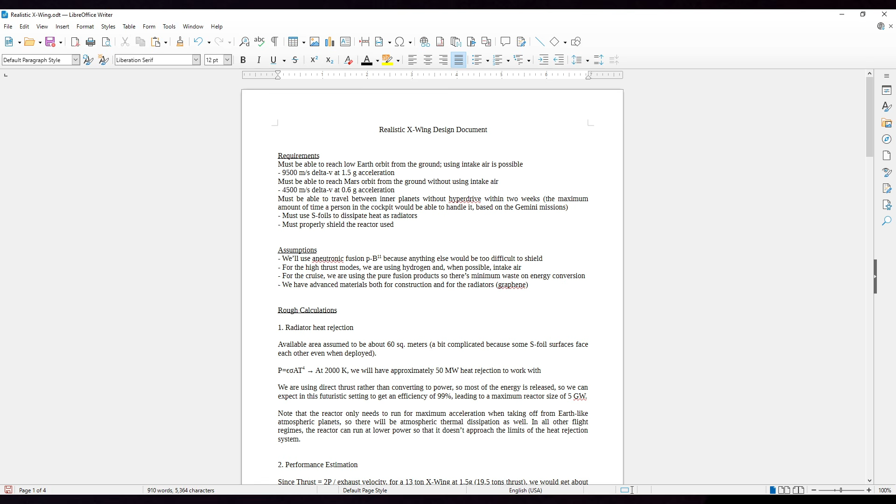So I have decided to do the calculations for this. And so this is going to be a math thing. I'm going to talk through exactly what can be done about this situation. Now, this is admittedly not the kind of thing that I tend to get many views on. As soon as I show this as a text document, people run away. That's why I started with Blender and the X-Wing there. But we are going to talk about a realistic X-Wing design that might work, and I'm going to go through it in detail, and then you guys can tell me what you think.

So what are our requirements? Must be able to reach low Earth orbit from the ground using intake air if possible, right? It seems to have intakes, right? So we're going to assume that they are accessible, that we can make use of them. We need 9,500 meters per second of delta V at 1.5 g acceleration from the start. It also must be able to reach Mars orbit from the ground on Mars without using intake air. So that's 4,500 meters per second delta V at 0.6 g's acceleration.

Must be able to travel between the inner planets without hyperdrive within 2 weeks, the maximum amount of time a person in the cockpit would be able to handle it based on the Gemini missions. The cockpit seems to be a normal cockpit. The Gemini astronauts were able to deal with it for 2 weeks. I am going to assume that 2 weeks is possible going from one planet to another. We're not going to deal with outer planet distances. I have never actually seen in Star Wars them traveling between outer planets. They're always traveling between small rocky planets. So we're going to go with that to simplify things.

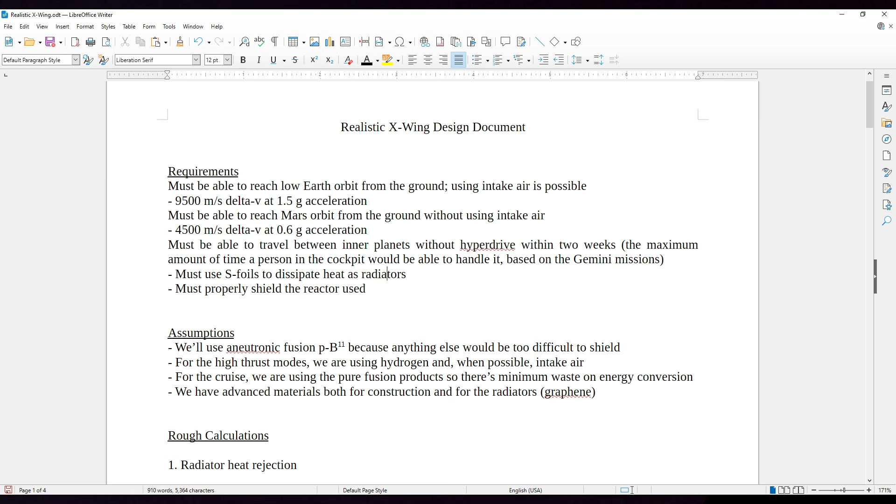Must use S-foils to dissipate heat as radiators. Well, what else are we going to use, right? Must properly shield the reactor that is used. So this is our realism. We are going to actually have some delta V calculations. We're actually going to talk about the radiators and shielding.

So the assumptions: we'll use aneutronic fusion, that's proton-boron-11, because anything else would be too difficult to shield. It produces too many neutrons, and then our shield would be heavier than we want it to be. Realistically it's probably heavier than we want it to be anyway, but we're going to assume that the people of the ancient galaxy were a little bit more radiation resilient, maybe. I don't know. But it depends on how you look at the confinement of it. And also the fact that we are running it for at least 2 weeks, right? So let's not talk about it. Anyway, we'll try our best.

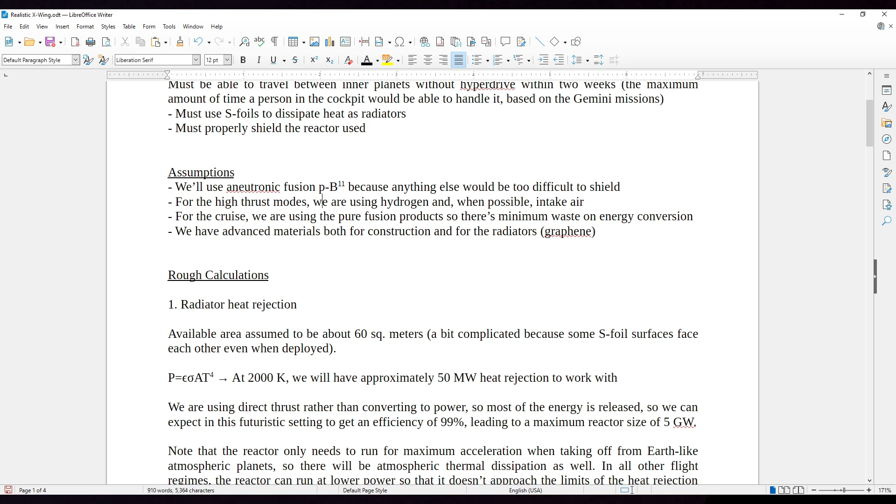For the high thrust modes, we are using hydrogen and, when possible, intake air. For cruise, we are using the pure fusion product, so there's minimum waste on energy conversion. So we're just spitting out the result of the proton-boron fusion, okay? And so it's the actual fusion results that we are sending out there. We have advanced materials, both for construction and for radiators, graphene or something like that. So we can get a good temperature on them.

So radiator heat rejection. Available area is assumed to be about 60 square meters. It's a little bit of a problem because the S-foils have surfaces that face each other, right?

So I'm not counting the full amount of those surfaces, but we need them to radiate a little bit. So it's sort of like each of those has got a good 12 square meters and a bad 3 square meters, sort of like that. Anyway, that amounts to 60 square meters is what we're aiming for here with the 4 wings, if you will.

And then there's the equation that determines how much heat rejection we can get out of the radiation from the radiators, not the radiation from the reactor. So this will scale our reactor, is what I'm saying. So at 2000 Kelvin, which is pretty hot, but maybe we can manage that. Certainly some of the fancier radiators in KSP Interstellar can do much more than that. We will have approximately 50 megawatts heat rejection to work with based on this equation.

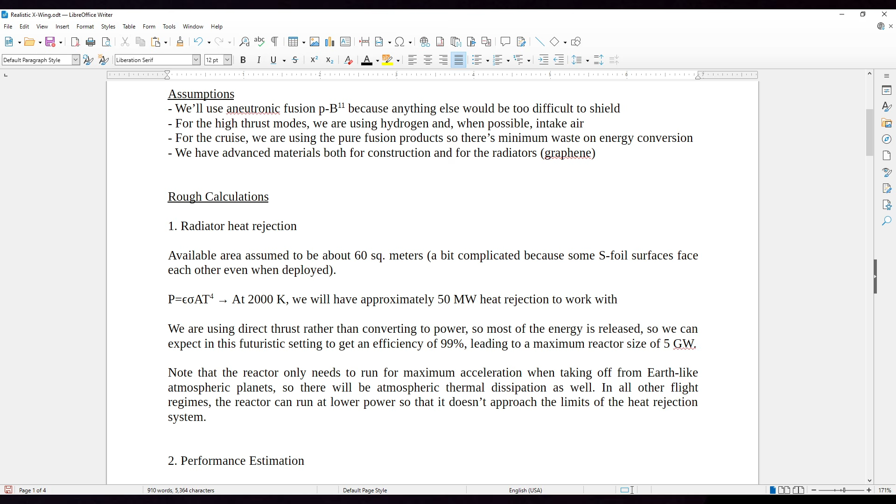And we are using direct thrust rather than converting to power. So most of the energy is released, so we can expect in this futuristic setting to get an efficiency of 99%. I'm asserting that. I've talked about the efficiency before, and I've corrected the far future engines based on the better ones having 99%, or even with the pure antimatter one having better than 99%, but this is what we're going with, 99%, which is better than anything we can do right now, of course. So when we say realism, we mean physically possible in theory. We're not talking about like we can do it right now.

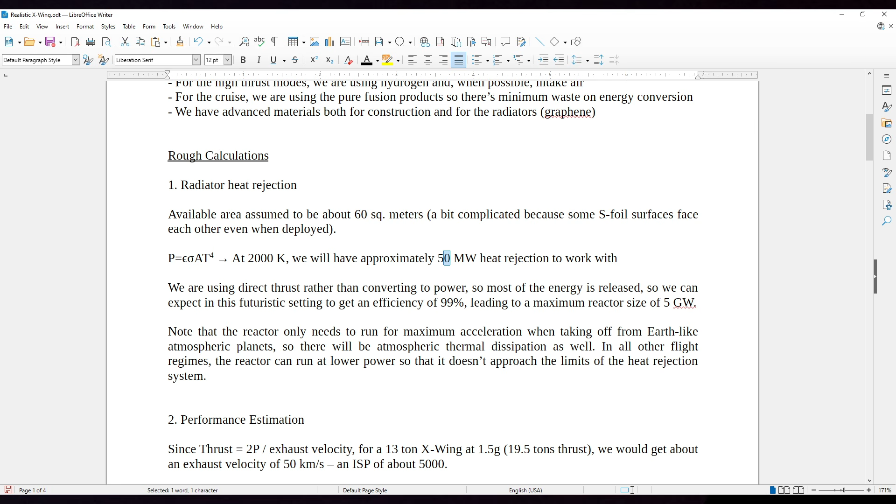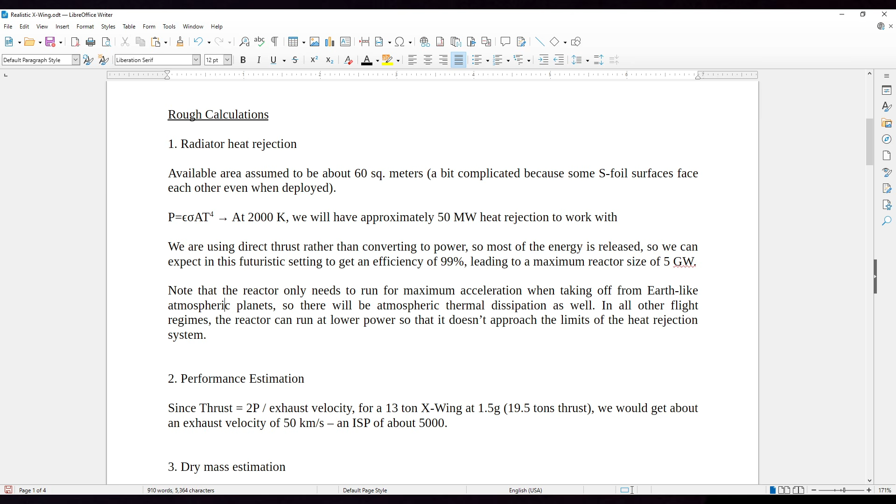Leading to a maximum reactor size of 5 gigawatts, right? If 50 megawatts is the 1% that we have to deal with as waste, then your reactor is 5 gigawatts. Now, note that the reactor only needs to run for maximum acceleration when taking off from Earth-like atmospheric planets. So we don't need the full 1.5 Gs of acceleration later on in launch. We just need it right off the ground, and then we can pull back, especially since the craft will be getting lighter as it uses the propellant, but also because you don't need to go 1.5 Gs all the way to orbit. So you can go to 1 G and then maybe even less than 1 G.

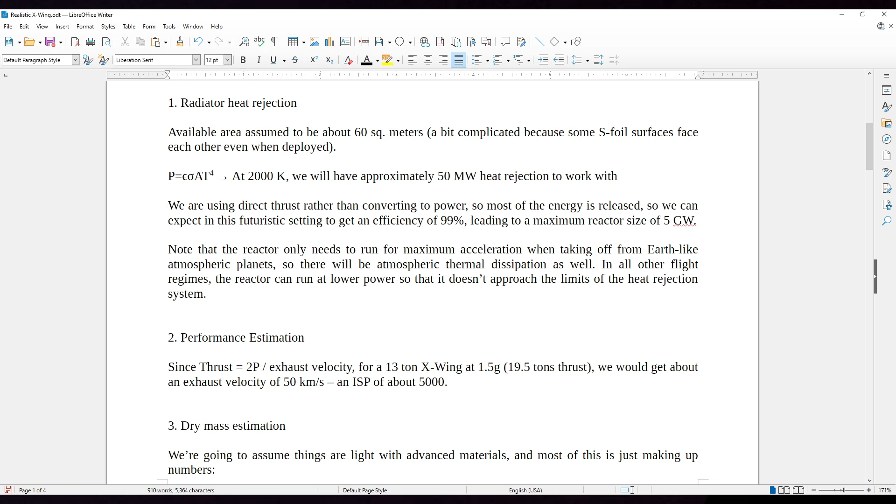So there will be atmospheric thermal dissipation as well. The atmosphere will help. We don't have to rely just on radiation to get rid of the thermal load. And in all other flight regimes, the reactor can run at lower power so that it doesn't approach the limits of the heat rejection system. There's a caveat to that. If we really wanted to cruise between the planets at full tilt for 2 weeks, it would be using the full capabilities of the reactor. So you might need to take more than 2 weeks.

But anyway, performance estimation. Since thrust equals 2 times the power divided by the exhaust velocity, say for a 13-ton X-Wing, I seem to recall that the X-Wings were supposed to be 13 tons. Then at 1.5 Gs, we need 19.5-ton thrust. Let's just call it 20 tons of thrust. And we would get an exhaust velocity of about 50 kilometers per second. So that's an ISP of 5,000. How do you get this? Well, you can do this one in your head.

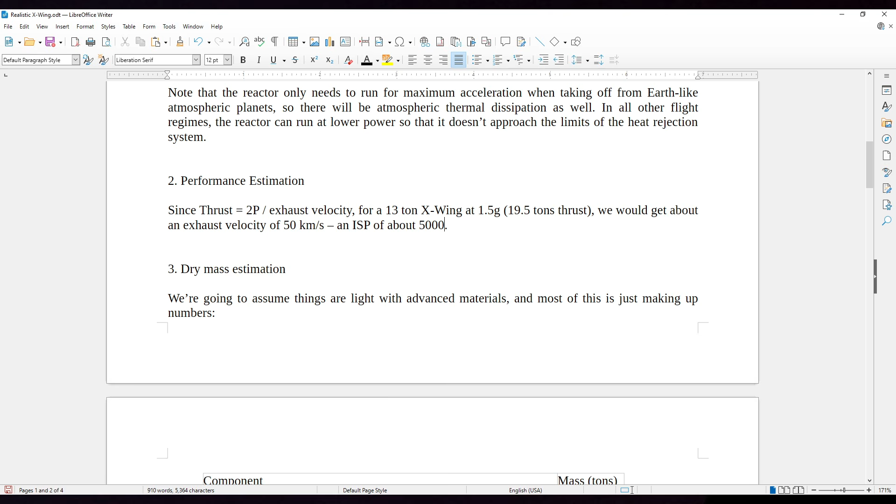2 times the power. The power is 5 gigawatts, so that's 10 billion. And then the thrust that we need is 20 tons, which is about 200 kilonewtons. So that's 200,000 on the thrust side, and then here we have 10 billion. If you move the exhaust velocity over by multiplying and then divide by the thrust, it's 10 billion divided by the thrust of 200,000, so you get 50,000 meters per second, 50 kilometers per second. That exhaust velocity is about 5,000 seconds of ISP.

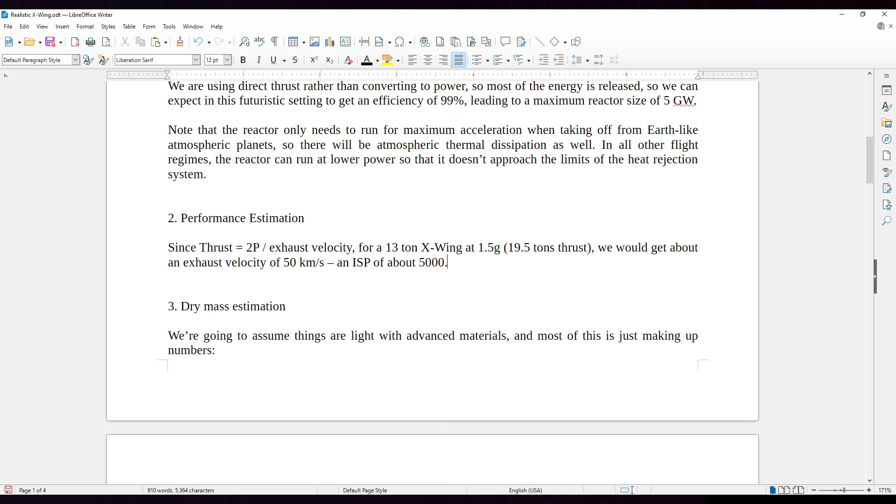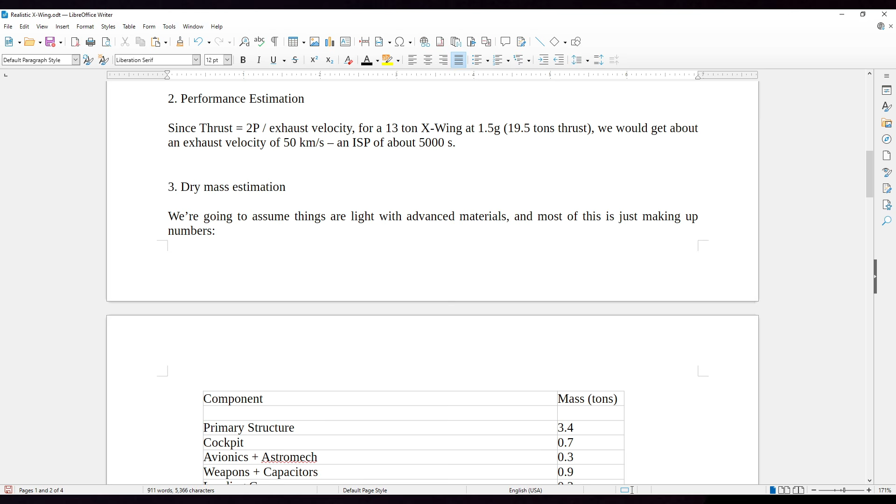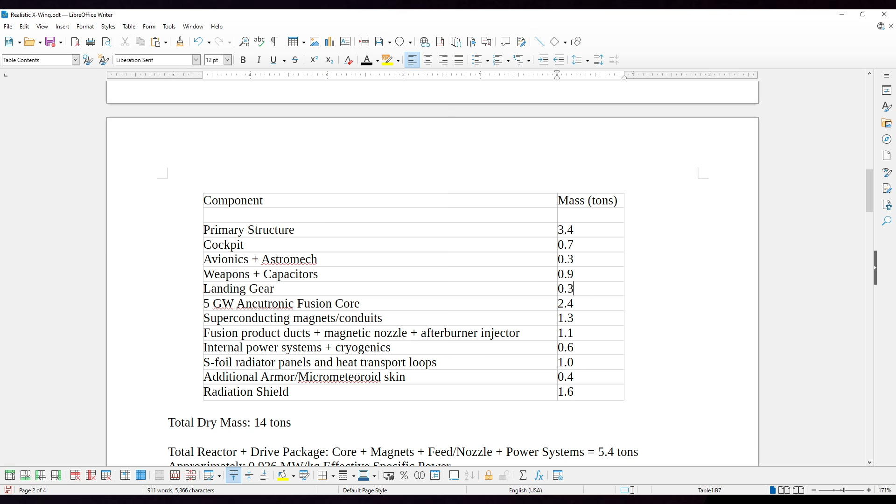Okay, dry mass estimation. We're going to assume that things are light with advanced materials, and most of this is just making up numbers. We have the primary structure at 3.4 tons. The cockpit is 0.7 tons. The avionics, with the astromech droid, is 300 kilograms. The weapons and capacitors for the weapons are 0.9 tons. That could be lighter, really. Landing gear, 0.3 tons. Usually I would say the dry mass would be higher without advanced materials. We're going with advanced materials, so.

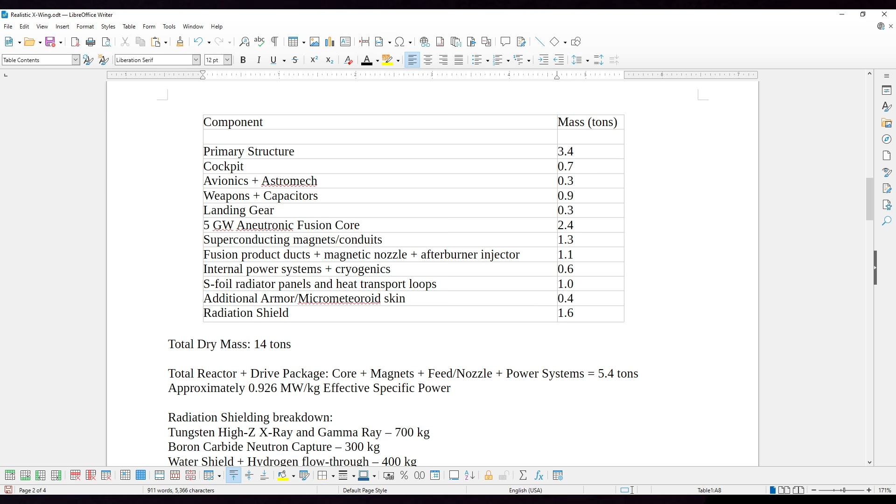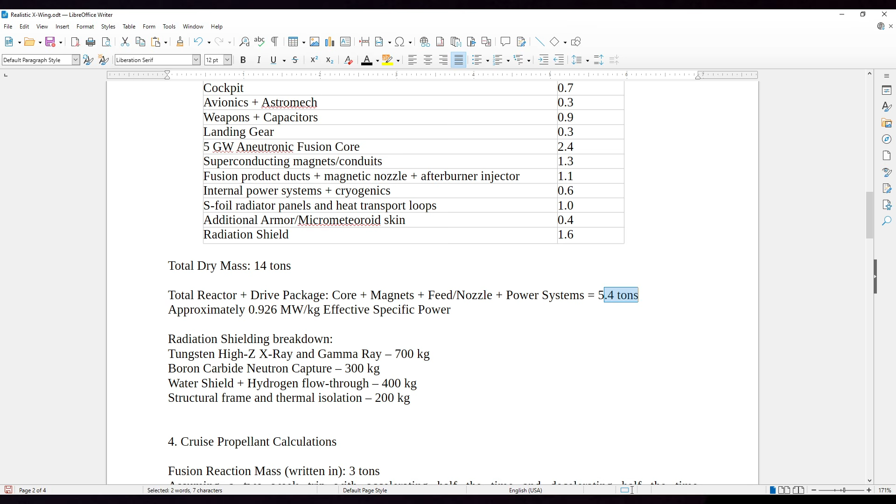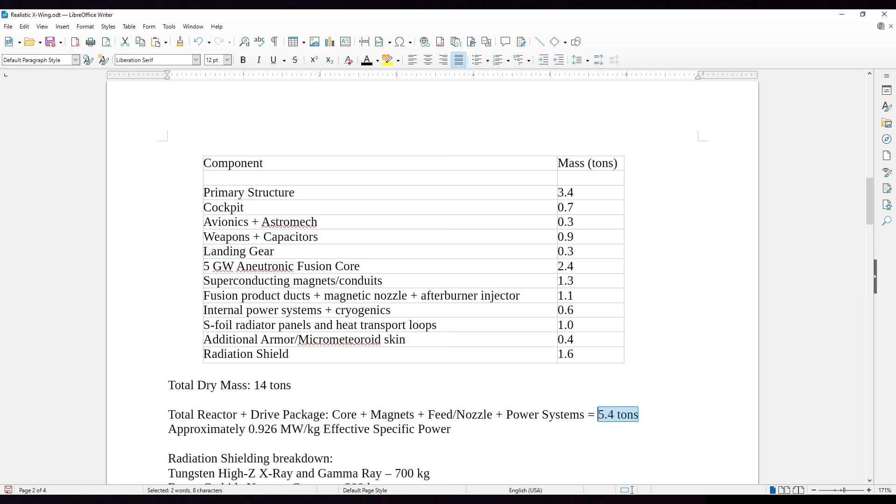The 5 gigawatt aneutronic fusion core we've got in at 2.4 tons. That's a very good, whatchamacallit? Oh yeah, effective specific power. This effective specific power includes the magnets, the feed, and the power systems. All of that combined, the superconducting magnets and everything, is 5.4 tons. And then we get a specific power of basically 1 megawatt per kilogram. That's what I was aiming for. So I sort of had this predetermined. I wanted about 5 tons so that we ended up with 1 megawatt per kilogram. And of course, I'm making up these numbers, so 1 megawatt per kilogram is what we're going with for the 5 gigawatt reactor and its systems.

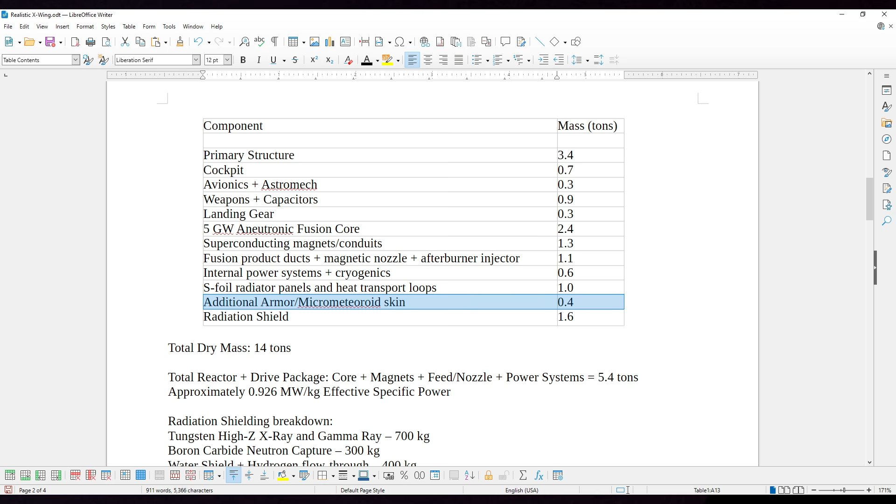So then we have the radiator panels. I just made it a ton. Additional armor, micrometeoroid skin, 400 kilograms. And then a radiation shield, 1.6 tons. That breaks down here. Mostly the tungsten for X-rays and gamma rays, because that's mainly what an aneutronic thing does. Aneutronic doesn't mean that it doesn't have neutrons, so we have some shielding for that.

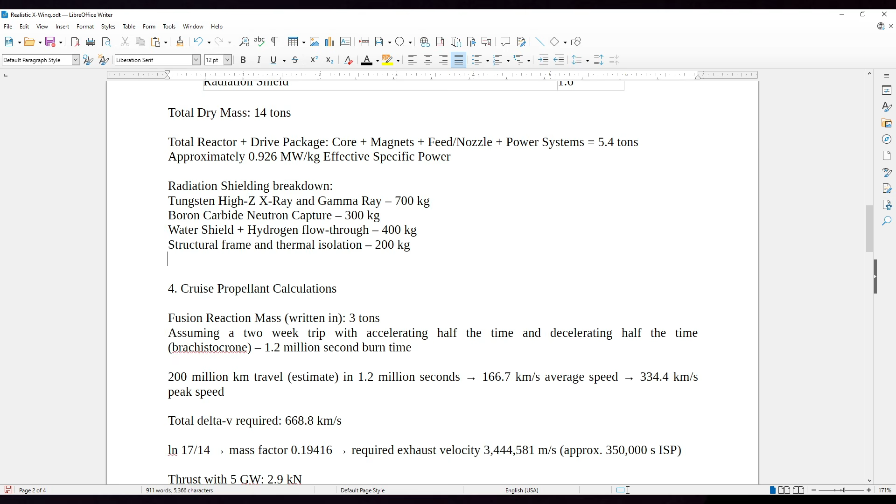Some shielding for that. And then the structural frame and thermal isolation. So, that is how the mass of it breaks down as far as I'm concerned. And now that I've made that up, I mean, we have to come up with something. How are you going to do it otherwise? So, okay. Now we try to do it legitimately.

Fusion reaction mass. I'm going to guess and check. We're going with guess and check here. I'm guessing that I'm going to load in 3 tons. Okay? I don't think it's got a whole lot of room for more. So we're going with 3 tons, and I'll have to double check the volume that would actually take up later. We might scale up the X-Wing just a little bit if it doesn't have enough volume.

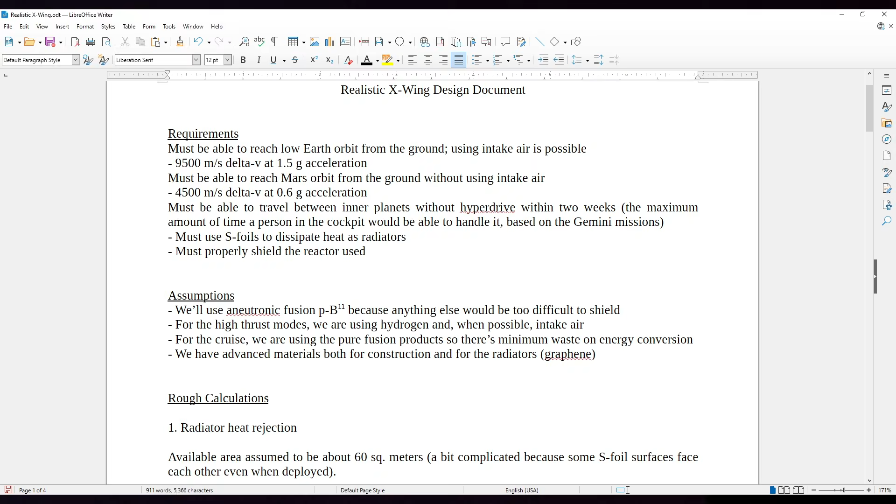Assuming a 2-week trip with accelerating half the time and decelerating half the time, so brachistochrone, that's 1.2 million seconds, okay? Because we have to do meters per second and all this. We had up here that the requirement was it should be able to travel between the inner planets. And I've said that the range we're talking about is 200 million kilometers. Weird to talk about range when it comes to space, but when you've got a brachistochrone situation and a limited amount of time, you then end up with range. If you don't have a limited amount of time, of course, you can just keep going wherever you like.

So 200 million kilometers travel distance in 1.2 million seconds means that we have to go 166.7 kilometers per second average. And even though we're actually losing mass, and so our acceleration is going up, we're just going to assume that the acceleration is flat. And so we're going to get a peak speed of 334.4 kilometers per second. Now, if we start at 0, get to 334, then start decelerating back to 0, that takes a total delta V of double that.

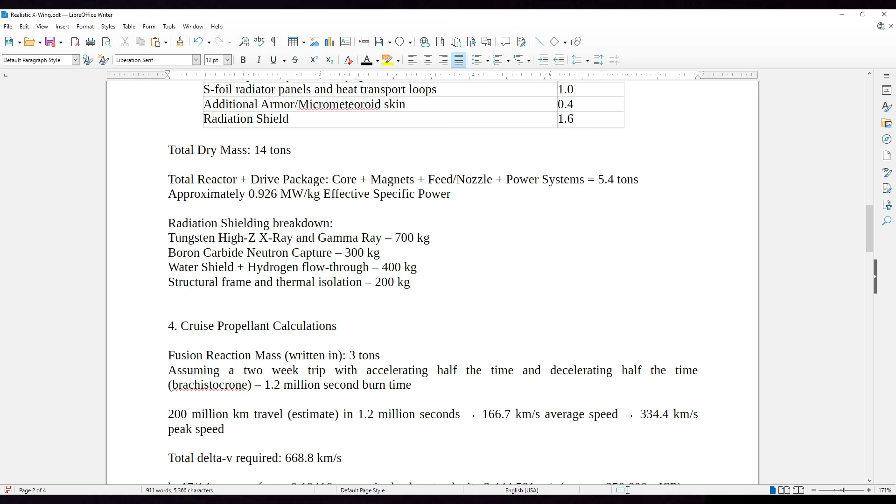Now, we said that this is 3 tons, so that's a 17-ton wet mass, and the dry mass is 14 tons. That means that we have an ln 17 over 14 in our mass factor in the rocket equation. So therefore, the required exhaust velocity to get the delta V is 3.4 million meters per second, or 3,444 kilometers per second. So that is an ISP of about 350,000. I don't use that, I'm just giving a round number so that people can wrap their head around it.

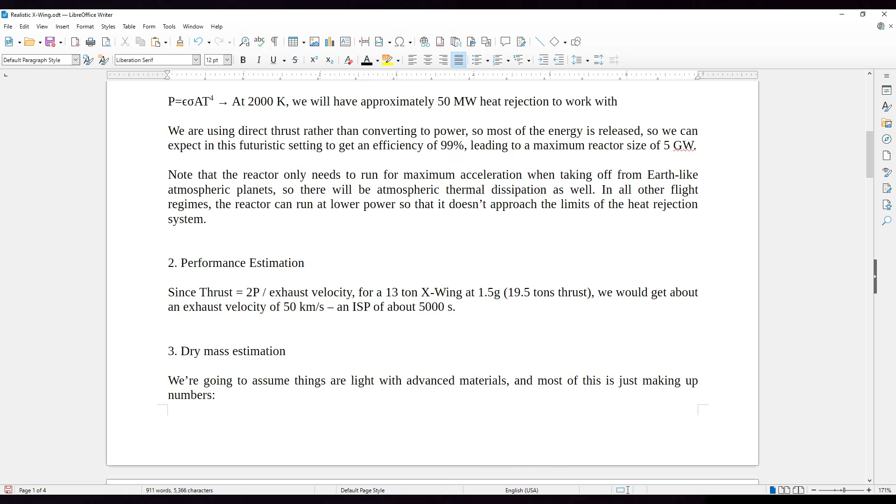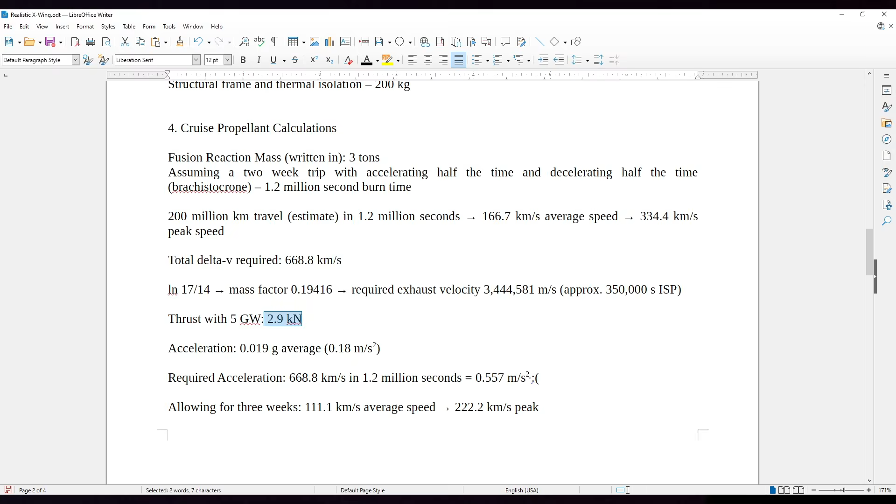So I take this number and then figure out the thrust that I would get with 5 gigawatts, using that equation up here. So we can generate 2.9 kilonewtons of thrust. That gives us this acceleration, 0.18. Then I compare with what I would need, because we need this amount of delta V expended altogether, and we have this amount of time. That divided by the seconds is the acceleration. Well, we don't have that acceleration, right? We have a third of that acceleration. So that's not good. Sad face.

So allowing for 3 weeks instead of a 2-week trip. Maybe our Luke Skywalker can survive that, 3 weeks cooped up in that little cockpit with only R2-D2 to speak to. We have 111.1 kilometers per second average speed, 222.2 kilometers per second peak. It's basically a straight ratio. We've increased time, so we cut down the speed by a flat amount, direct relation. Total delta V then is 444.4. Required exhaust velocity, with the rocket equation, same mass ratio, is 2,288 kilometers per second, or an ISP of 230,000.

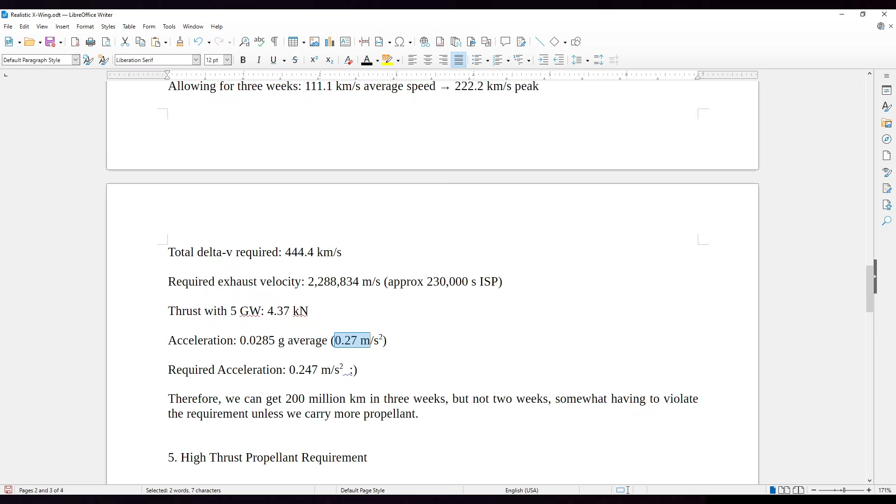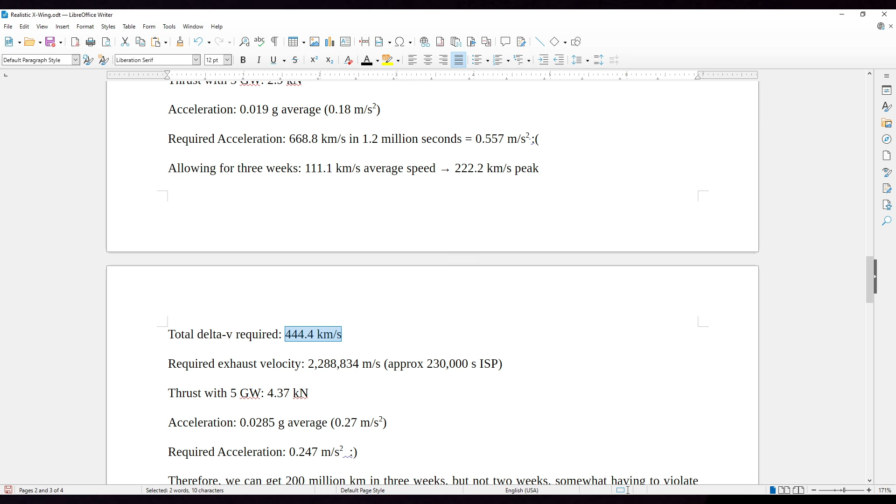If we have that lower ISP, then we get more thrust with our 5 gigawatts, because it's a direct trade-off with that power equation. More thrust gives us more acceleration. We can now get 0.27. We have more time and we need less delta V, only 444.4, divided now by 1.8 million seconds. So the acceleration necessary is 0.247 meters per second squared, and that is less than the acceleration we have. So now we know we can do it.

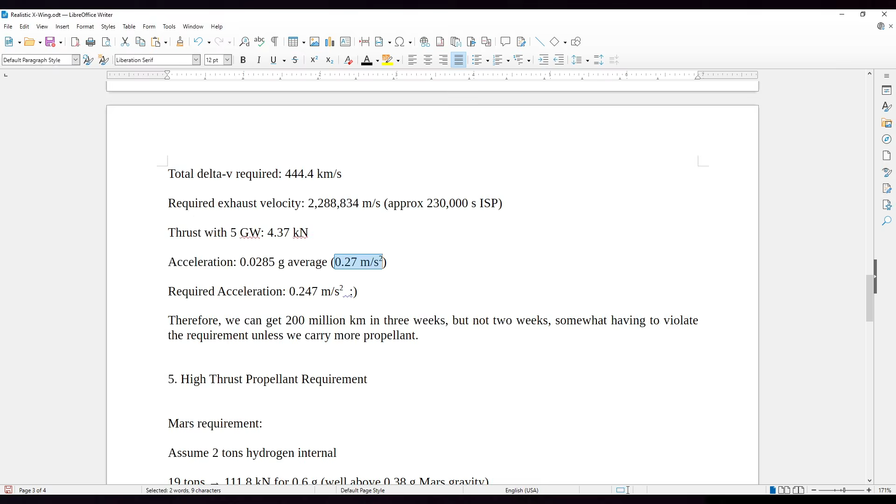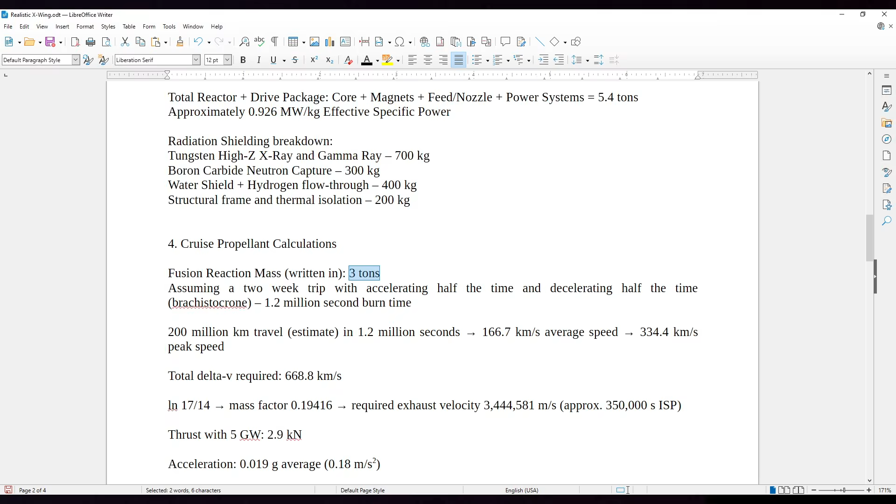Therefore, we can get 200 million kilometers in 3 weeks, but we can't get the 2 weeks unless we carry more propellant. But this is all assuming that we go with the 3 tons. That's the guess and check. So if we wanted to bump that up, we could then potentially do this.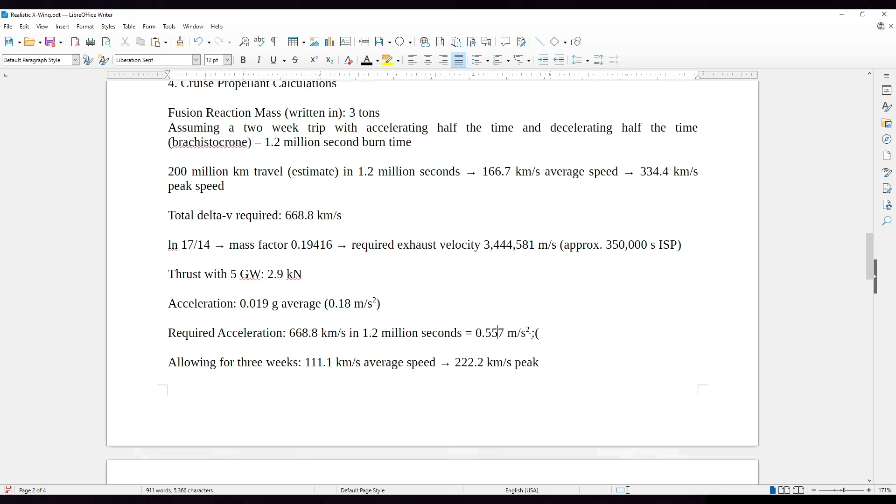So we would have to carry a lot more propellant, though, because we're talking... We are not getting fast enough here. I don't think bumping up the propellant would help, actually. I think we would have to bump up the reactor size. So we would need more than 5 gigawatts. We would need something more powerful. But maybe even a modest increase in the reactor size would be able to do it.

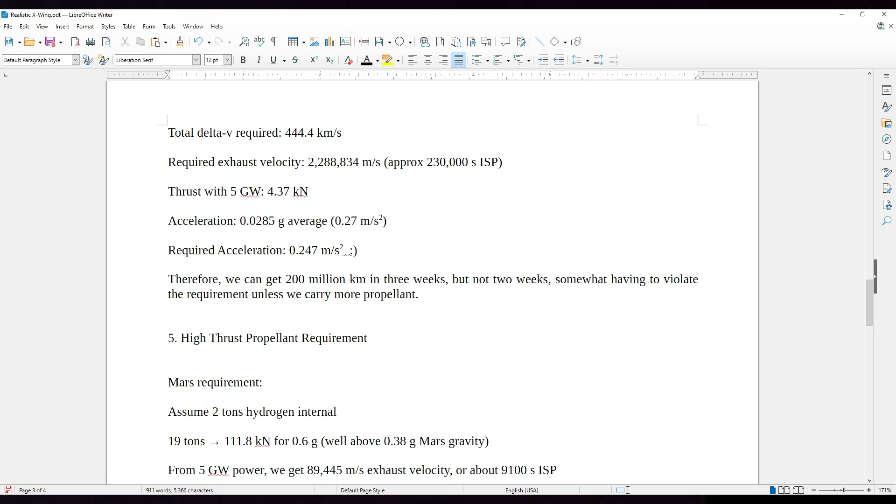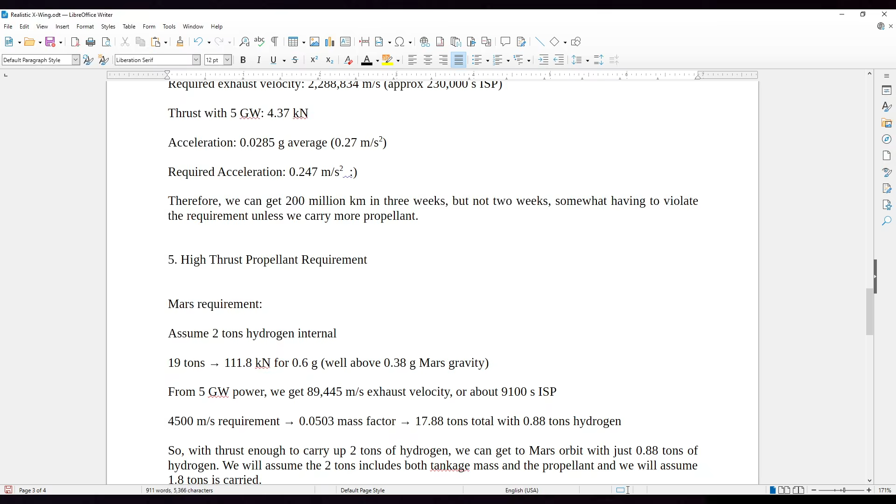Because, well, it's a trade-off, so both thrust and the ISP can be increased by the increase in the reactor. So, anyway, this seemed okay to me. I went with the 3 tons of propellant, 5 gigawatts. After all, we can't do more than 5 gigawatts as long as we keep the 99% efficiency on the thermal stuff. So, as long as we have the radiator size the way we do, we can't do more than 5 gigawatts, so we're going with it. So, fine, 3 weeks. Now we have to check the high thrust situation.

So now, in order to travel, we need to have the 17 tons available to us. And now I, once again, guess and check, assume 2 tons of hydrogen inside. This is ideally stored in the wings, potentially. Well, I don't know if it's ideally. I'll have to figure out where all this fits. But okay, let's say we've got 2 tons. So that's now 19 tons total.

And if we want 0.6 Gs, which is a nice margin on Mars's gravity. Basically, I thought of Mars's gravity as 0.4 multiplied by 1.5, just like we did with Earth. That's 0.6 Gs. So then we need this amount of thrust. Okay, 111.8 kilonewtons. Not much, but it's a small fighter, right? But that means that they can only get 0.6 Gs. It's not making fighter jet maneuvers here, but you know that they were messing around with that.

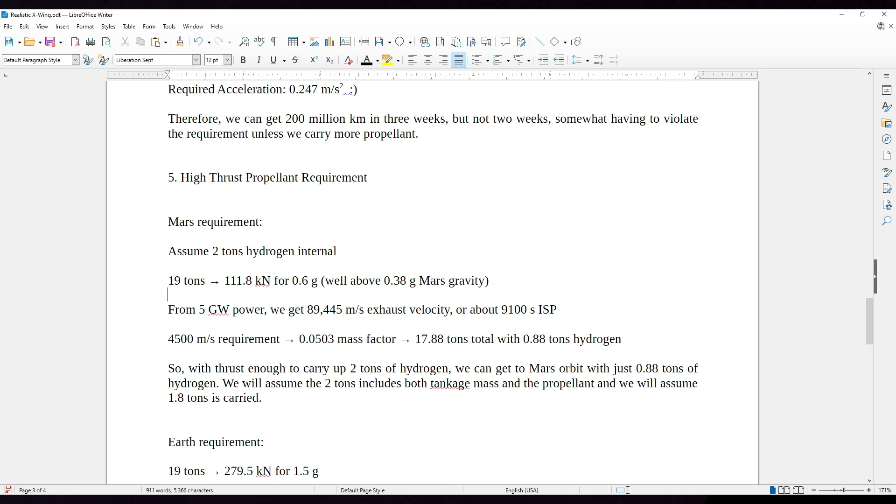Anyway, if you want to waste the fuel, you can. We could just pump more hydrogen through, and then you can boost yourself to whatever thrust you like, as long as you're willing to sacrifice the efficiency. So anyway, we'll set that aside for now, the fighter jet aspect of it. So from the 5 gigawatts of power in our reactor, we can get this exhaust velocity, or about 9,100 seconds of ISP. Not crazy, right? Seems pretty tame. That's what you get if you want the thrust. If you are willing to accept lower thrust, you get more ISP.

It's just like that. It's because the reactor is putting the same energy into the little particles going out. And we're assuming a pretty perfect conversion on that because why not? It is advanced technology. A pretty perfect conversion is fine. So let's go with that. And so we get this 9,100 seconds of ISP. Since we need 4,500 meters per second to get from Mars' surface to Mars' orbit, that means working the rocket equation backwards, we need a mass factor of 0.05. When I say mass factor, that's the ln of the wet mass over the dry mass. That whole number is 0.0503.

And if we then use e to that number and multiply by what is now the dry mass, the 17 tons with the cruise fuel, we get 17.88. So we need 0.88 tons of the hydrogen. So that's not much. It seems like we could fit that in, right? So with thrust enough to carry up to 2 tons of hydrogen, right? We assumed 2 tons of hydrogen. We can get to Mars orbit with just the 0.88 tons of hydrogen.

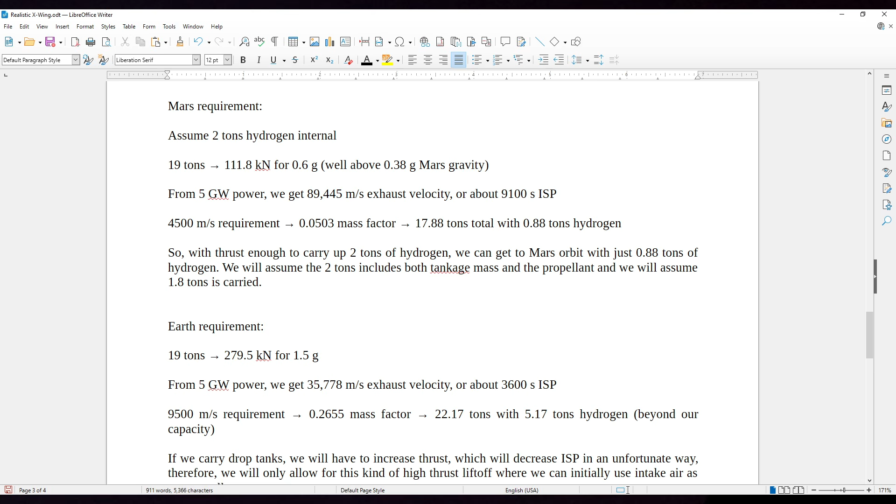So we will assume that we're carrying the 2 tons, but that includes the tankage mass, and so it's actually 1.8 tons carried. And I forget about this down here. I say 2 tons. So really, it's probably 19.2 or whatever the tankage mass is. I wrote that and then I totally forgot that I made that claim. Okay, no, maybe the structural mass can contain the hydrogen. I don't know. We'll have to do some finer work on this if we really want to make it rigorous.

I'm of course dumping the entire internals of the X-Wing as per lore because we need to actually make this all work out. So whatever lore says inside the X-Wing, I'm ignoring that by necessity. Except for the hyperdrive. Well, yeah, I've ignored the hyperdrive. We're going to assume that the hyperdrive is massless. It's fine if it occupies a volume. We just can't have it any heavier than it is right now, or it can be part of the structural mass. I don't know. We haven't accounted for it. I don't know how much a hyperdrive would weigh. Okay, so let's set that aside for now.

All right. Earth requirement, that's the hard one. We need 1.5 Gs to get off of Earth, and that means for 19 tons, we're going to need 279.5 kilonewtons. Is that right? 1.5 Gs. Yeah, I guess so.

Yeah, it's 2.5 times the Mars one. Okay, so from 5 gigawatts of power. Then if we get more thrust, we get less ISP. That's the new amount of exhaust velocity. And so now we have a requirement of 9,500 meters per second. That's the new mass factor. That's the ln of the wet mass versus dry mass that we need. But that leads to 22.17 tons for the hydrogen. And that means 5.17 tons of hydrogen.

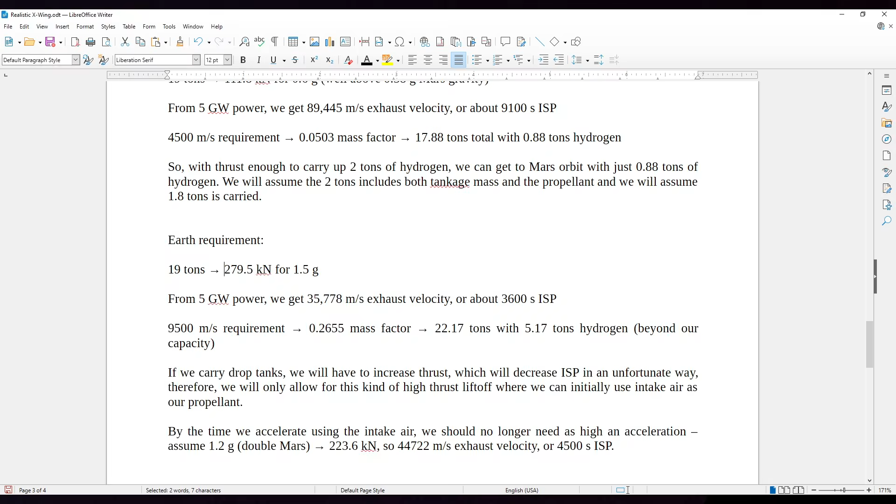We don't have room for 5 tons of hydrogen. And we didn't plan for it with our thrust. If we allow this, then we are going to have to increase this and increase the thrust. And then if we increase the thrust, we lower the exhaust velocity and the ISP, and it's just like a vicious cycle at that point. So if we carry drop tanks, which would be the solution to not having enough volume, then we have to increase the thrust, decrease the ISP, and so we need the intake air.

So it's good that the X-Wing had the whole being able to take in intake air potentially deal. I know that what looks like an intake is probably something else, but we're going to pretend that they're intakes. Okay, so by the time we accelerate using the intake air, we should no longer need as high an acceleration. I'm taking advantage of that. So by the time we finish with the intake air, I'm going to say that we only need 1.2 Gs instead of 1.5. So double Mars makes the math easier.

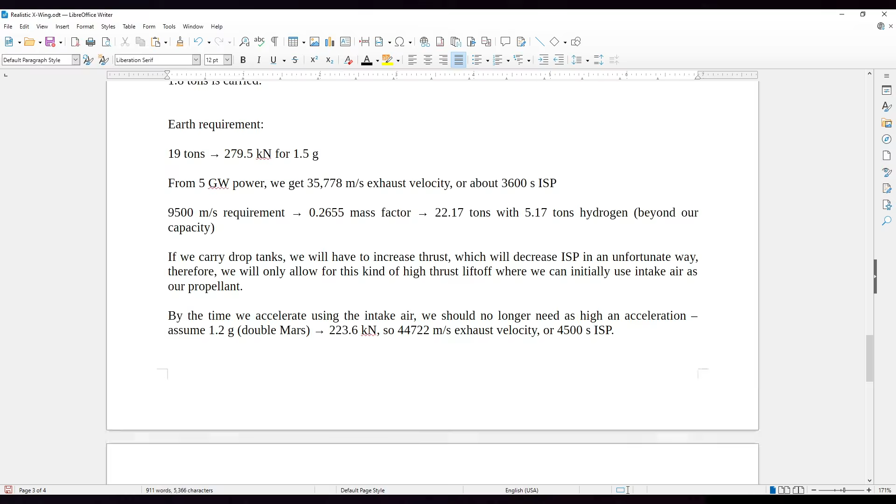And then that means 223.6 kilonewtons. It's still based on the 19 tons, right? We didn't burn any of that. We're just taking the intake air, shoving it through the reactor, and getting our thrust. So there doesn't need to be any combustion, so we don't need to use any of the fuel with that. We're just accelerating the intake air with the energy. Well, okay, we are using some from the fusion reactor. So we're using the fusion reactants, but at the rate that we would need to release the energy to accelerate the intake air, we're not using that much, so our mass wouldn't diminish very much.

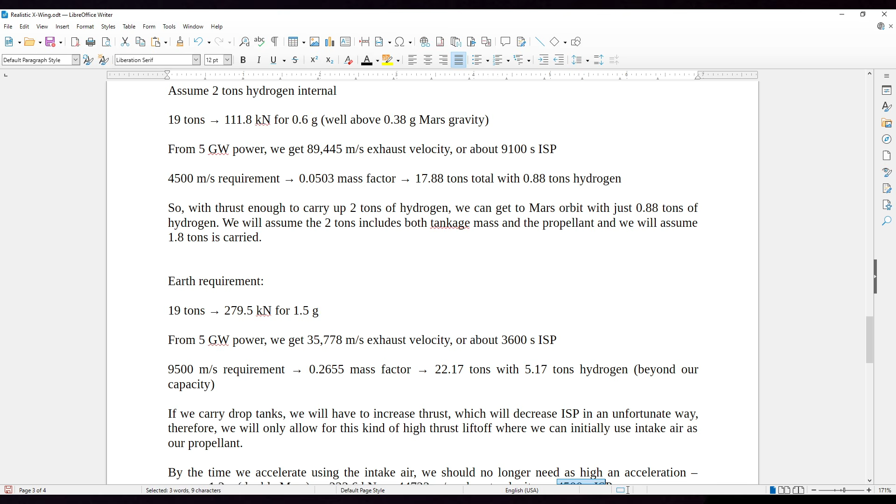So anyway, we get to bump up our exhaust velocity because we don't need as much thrust, and that amounts to 4,500 seconds of ISP instead of 3,600. So now our maximum current delta V with 2 tons of internal hydrogen, here I did 2 tons instead of 1.8, is 4,974 meters per second we can get out of the 2 tons once we've finished with the intake air and we need to continue on to orbit. I've assumed that we're going to have some losses, gravity losses, etc. So I'm only assuming 4,500. I don't think that's enough to make up for the fact I added that extra 0.2 tons in.

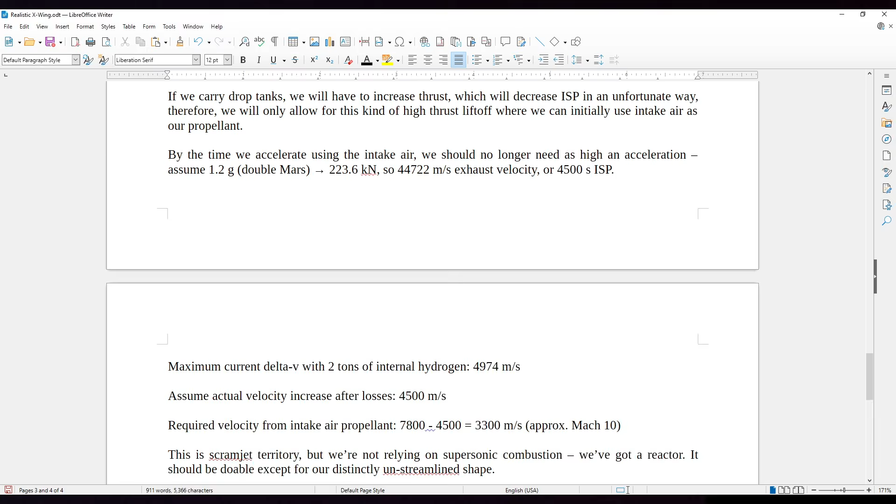Okay, so 4,500 means that from the intake air, we're going to need 3,300. We need to get to a speed of 3,300 meters per second, right? Some of it's going to be extra delta V necessary to fight against gravity or drag, but we just need to hit a speed of 3,300, about Mach 10. And that's scramjet territory, but we're not actually relying on supersonic combustion, so we don't need to worry about the scramjet part of it. Not that, I mean, the scramjet would be easier technology anyway, potentially.

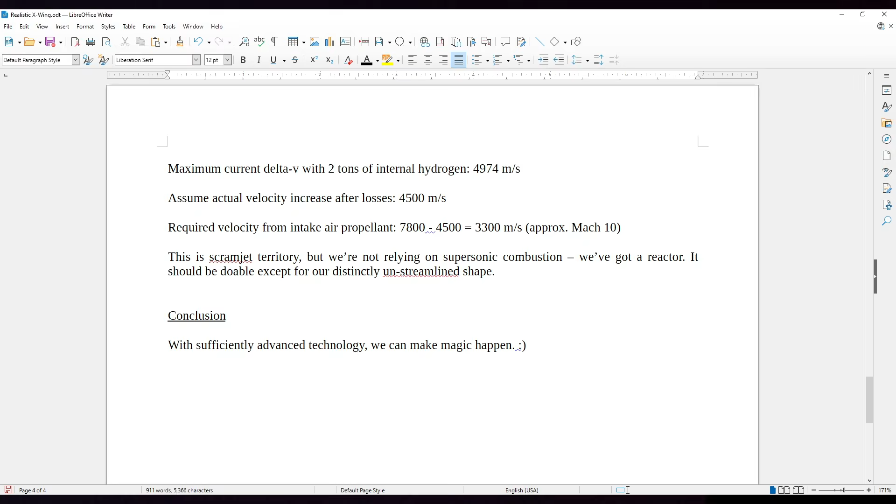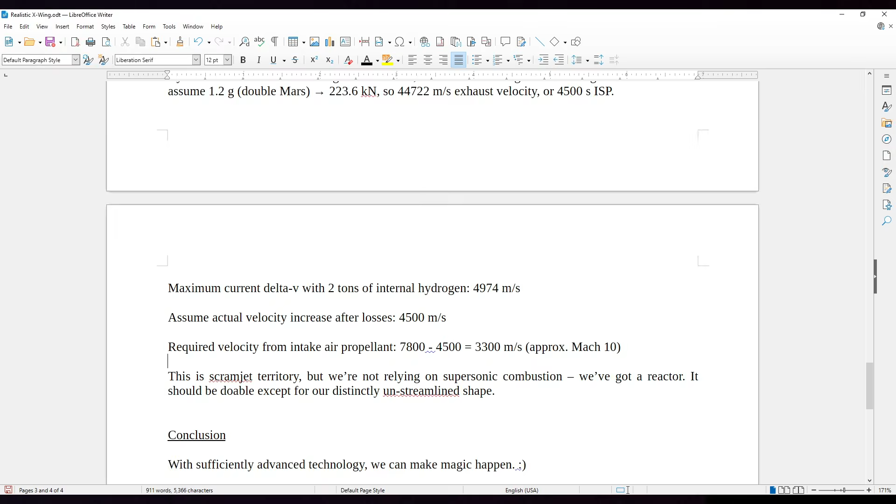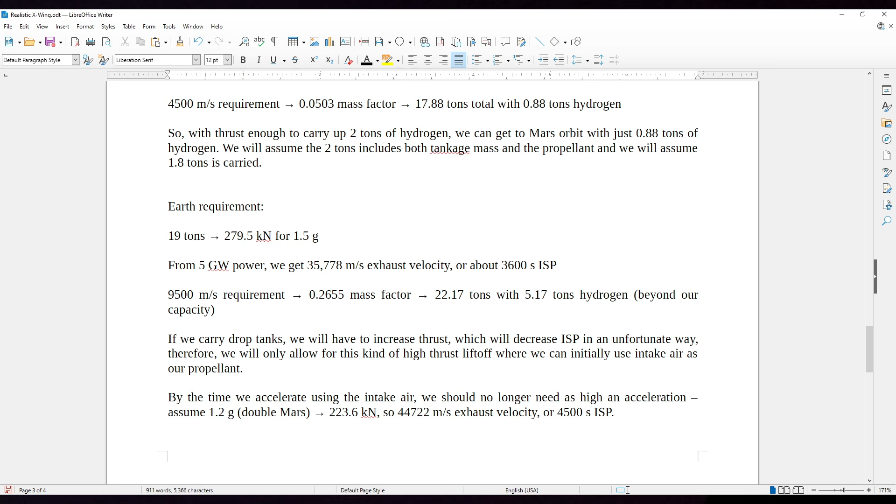So anyway, we've got the reactor. We don't have to worry about doing supersonic combustion. And the real only problem is getting to Mach 10 when you're shaped like an X-Wing is really bad, if you're in an atmosphere. So, yeah, that's the downside. So anyway, we've got the parameters for a realistic X-Wing, as I put here: with sufficiently advanced technology, we can make magic happen. A corollary to Arthur C. Clarke's famous law. So there you have it. That's the math of a realistic X-Wing.

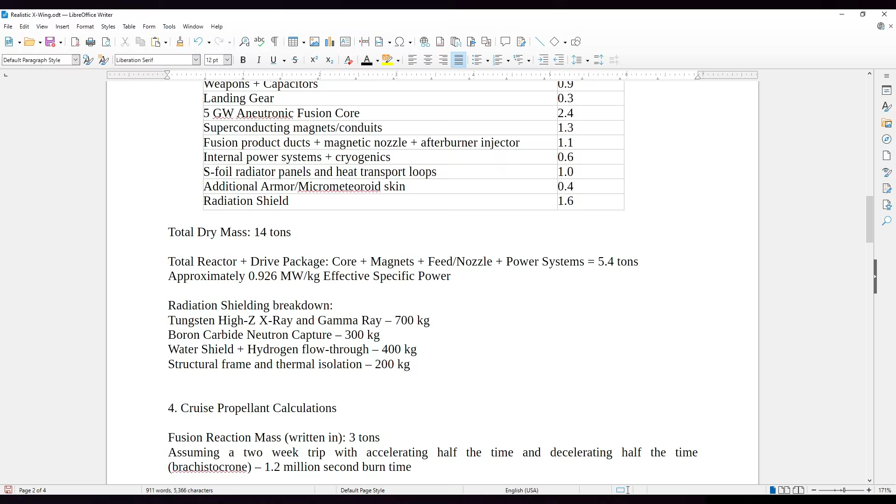I will probably try to implement it with my model in Kerbal Space Program, so it'll have the math all worked out and it'll be able to give you this kind of performance, and that should be fun. But of course, we don't have the hyperdrive deal, though I forget if I ever fitted a warp drive into the X-Wing model. I probably didn't, but I have done so for the Star Trek Enterprise model I have in the sci-fi pack.

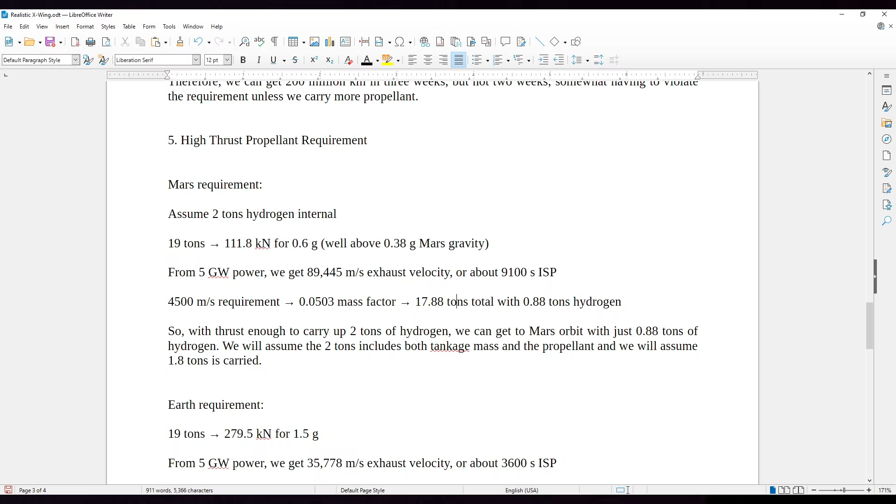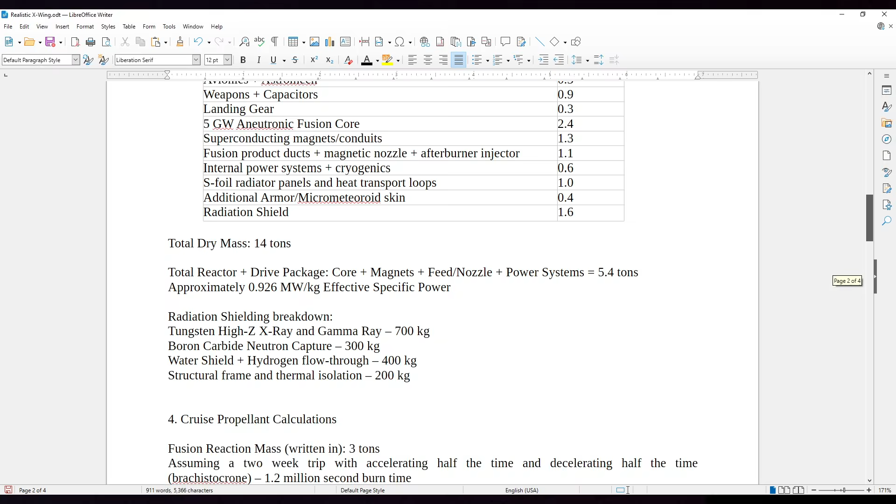And we will continue trying to make sci-fi work, as it were. I think I now know a dangerous amount, just enough to make a mess like this, basically.